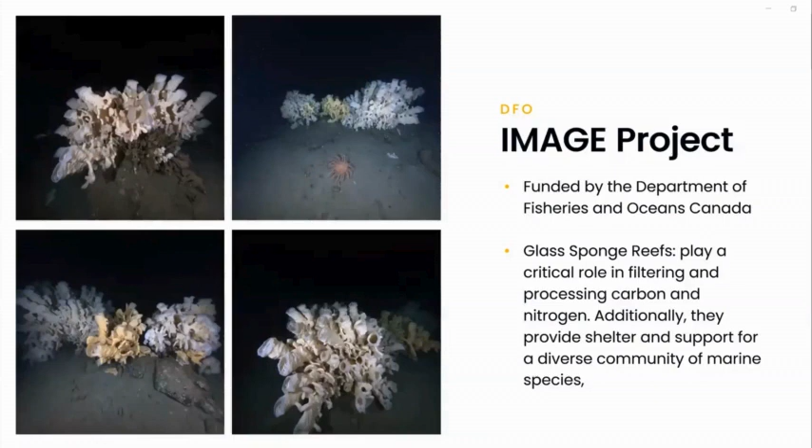The project has two main deliverables. Firstly, the 3D models, which will be used as a baseline to detect changes in the health of the reef for comparative analysis to data collected in future surveys. The second is to help with governance of the MPA, meaning identifying illegal fishing activity that could be taking place in the protected areas. We were able to achieve both of these goals, as can be seen in the models shown today, but also in some of the image and laser data, one of which clearly identified a net embedded in one of the reefs.

Next we'll go on to one of these really cool models that we collected. This is a forward-facing camera model of a reef on a cliff.

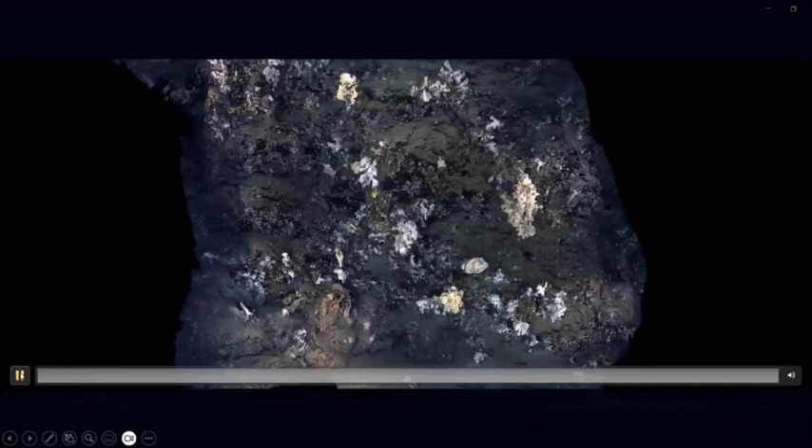Along with the deliverables, there were also four major goals we wanted to accomplish with the project. The first goal was to develop a viable monitoring system using our equipment, a solution that could be deployed from a dynamic platform like an AUV or an ROV to allow efficient and remote monitoring of these MPAs.

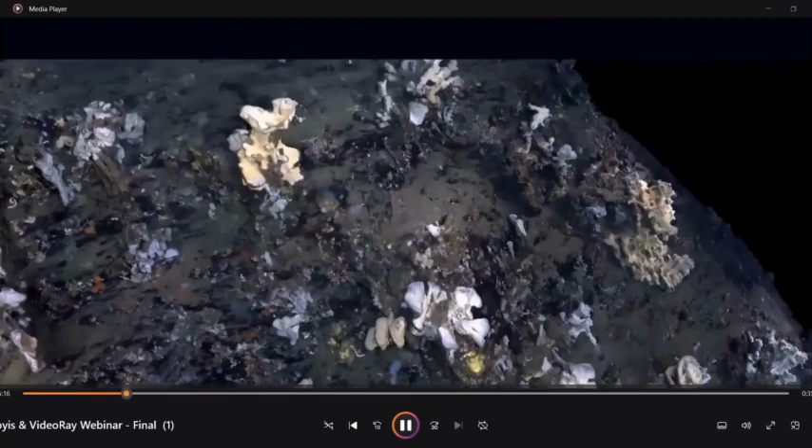The second goal of the project was to collaborate with the indigenous communities through training and mission planning. The traditional ecological and environmental knowledge provided by these communities is invaluable. The project looked to help empower indigenous communities with the technical capacity to actively participate in marine and environmental monitoring and ocean conservation planning.

Next was the physical survey of the habitat and the analysis of the data. It was important to work with different resources to effectively build out mission plans that would allow us to obtain the necessary data for analysis of the habitats of interest.

The final goal, once again, focused on governance and education. This included disseminating the data that was collected to help ensure further education and inform the development of novel methodologies, as well as site establishment.

Additionally, we looked to perform some assessment of an unsupervised training method, which automatically clusters the image data into a structured database. From there, representative images can be selected for each feature of interest, such as live reef versus dead reef, or any other feature of interest within these images, and then geospatially mapped to understand the distribution. With this new technology, researchers can enhance their conservation plan and decision-making.

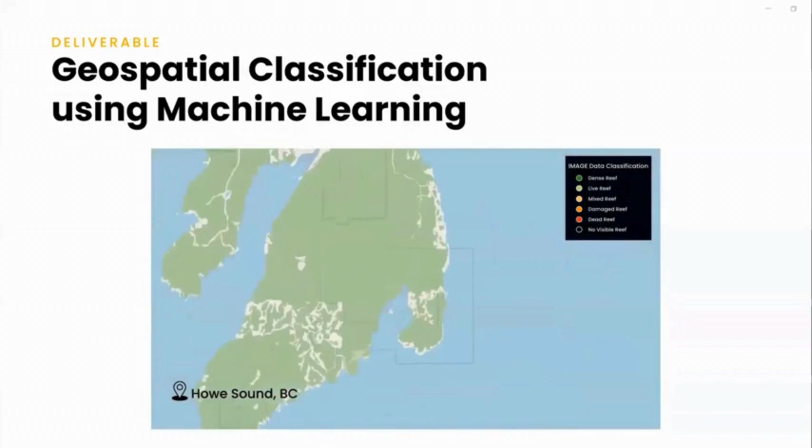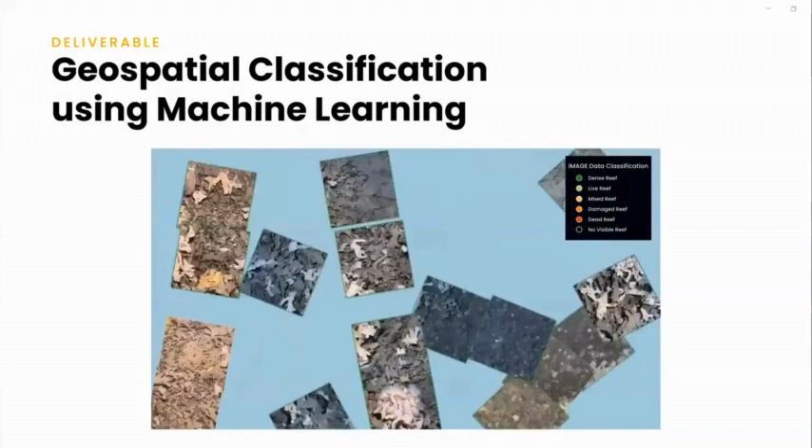The video currently being played is an example of stills image data tied to transects performed by the vehicle. The singular images represented show an average image found within that specific cluster at the provided location. All of our images have georeference on them, and that's partially the reason why we are able to do this.

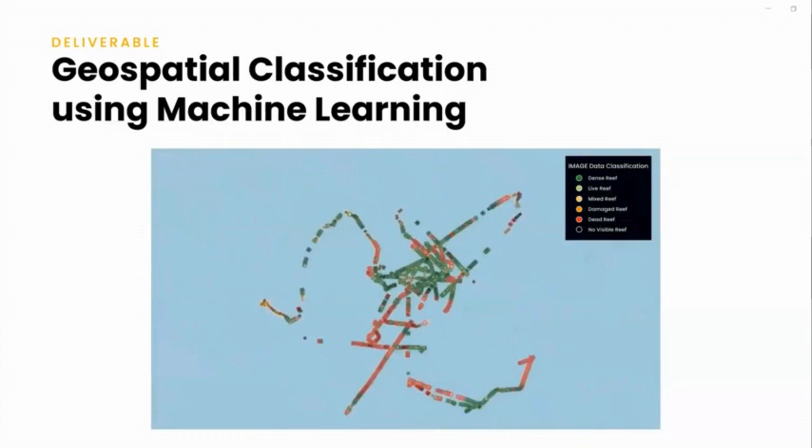So now let's talk about the project, and we'll focus a little bit more on the actual technology that was used to obtain the amazing results.

Here at Voyis, we've been working for some time in collaboration with VideoRay to enable the deployment of our sensors from their vehicle. For this project, we equipped the VideoRay Defender with the Voyis Discovery camera for enhanced piloting and forward-facing data collection, a perception skid for downward imaging and laser scanning, and finally a Sprint Nav Mini for improved navigation.

The Defender is an optimal vehicle for this application, as it's got maneuverability, which helps ensure that we are able to obtain the proper vantages of the target. This is important to collect data from all angles.

So now a little bit more about Voyis as a company. I want to provide you with a little bit more information and take a deep dive into the specific systems that were used on this project, their capabilities, and their functionality.

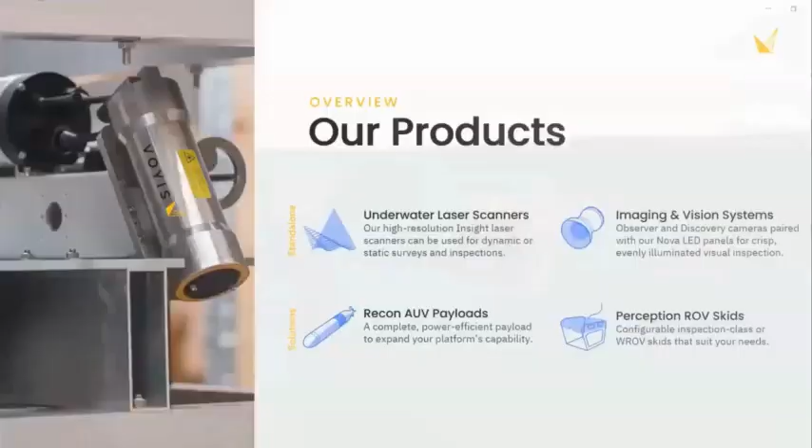At Voyis, we look to provide versatile optical solutions that expand your underwater capability and enhance the understanding of remote challenging environments. We accomplish this by using subsea laser scanners and digital stills cameras with data enhancements and corrections on board the sensors to enable real-time analysis of data on the fly. So as you can see, we provide standalone sensors, but also a few different offerings that are a combination of our core products, the laser scanning and stills imaging equipment.

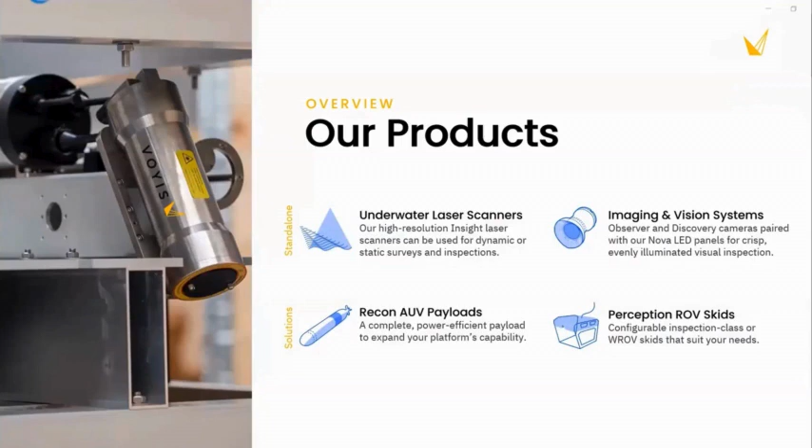Jumping into more details on the products, first up is our Insight underwater laser scanning systems. I'm not going to go into much detail about the different models. If anybody's interested, by all means ask afterwards, reach out. But I want to expand a little bit more on the Insight Micro, as this is the system built into the perception skid, and this was the equipment used for the downward collection portion of the survey.

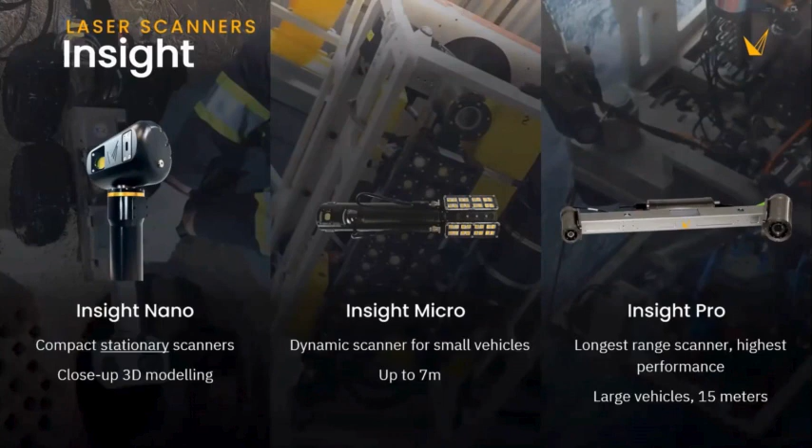So the Insight Micro is a dynamic laser scanner that enables small vehicle platforms to perform high accuracy inspections by combining both laser and stills imaging equipment into a singular package. As you can see there, we've got the built-in stills, laser emitter, and LEDs all in one single package.

Now a little bit about how the system actually works, its functionality. The system provides gapless laser data such that the two technologies cause no interference to one another and work harmoniously to collect dual data sets of the same target. This is achieved by capturing stills images in the short time in between laser pulses. This helps ensure that there'll be no visible laser lines in the stills data, and vice versa, that the flash from the LED will not wipe out the laser line.

The laser itself projects a 50-degree swath, which is swept across the target. This line is comprised of a series of individual points, which are triangulated based on a fixed distance between the laser emitter and the laser receiver. And then all of the data from the point clouds can be viewed in real time by the topside operator as the data is being collected. Now, obviously, the caveat to that is it has to be a tethered vehicle. Otherwise, all the data will be saved on board the sensor itself.

So next, we will jump into the discovery systems. The Discovery Vision systems were designed to avoid compromise between using a piloting camera, which prioritizes low latency over high quality data, and inspection cameras, which tend to prioritize high quality data over low latency.

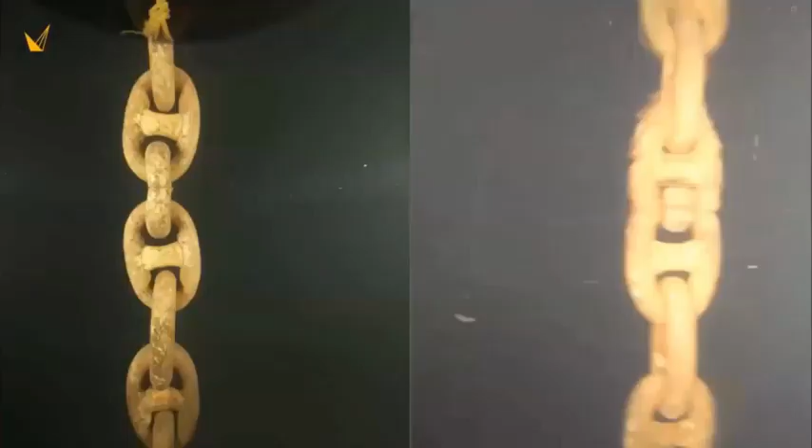This is an example of comparative images collected from a standard ROV camera versus our Discovery camera, in a low light situation. We can see the Discovery camera provides a clear representation of the target. This is largely because it leverages a high dynamic range with 12-bit depth, uses a global shutter rather than a rolling shutter, and captures images at extremely low exposure times. Coupling this with real-time enhancements of light leveling, color correction, and distortion correction shows the quality of the data, which will help improve efficiencies in ROV operations.

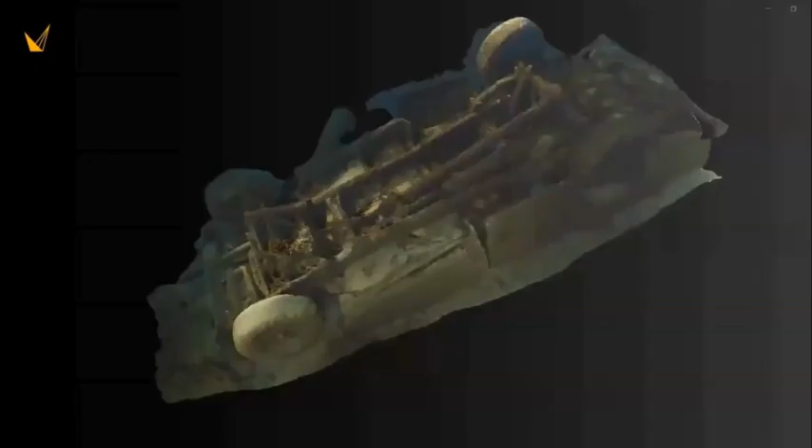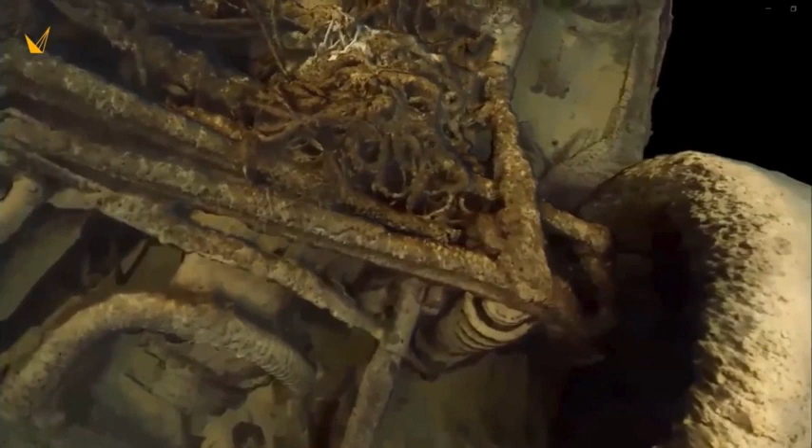Here is another example of a 3D model generated using images collected from the Discovery camera, deployed from a VideoRay Defender vehicle. This model was made using off-the-shelf photogrammetry software and images generated from the Discovery camera. I think this model perfectly exemplifies the ease with which the final product can be obtained when utilizing really high quality data for model generation. Now, it's important to take a closer look at the process which allows us to obtain these high quality images.

One of the key features of our imaging systems are the real-time correction algorithms applied to the data. All images collected from our imaging solutions are run through a series of algorithms to enhance image quality and correct for the underwater environment. First, the images are subjected to an undistortion and debayering process. From there, the data undergoes light leveling to establish even illumination across the entire image, so there are no dark edges or corners, which is very important when building out photomosaics or photogrammetry models. Finally, the images are color corrected.

However, the actual hardware used to collect the data plays just as much of a role in the quality of the data as the enhancement algorithms. One of the key features that makes these enhancements possible is leveraging dynamic range to its fullest extent.

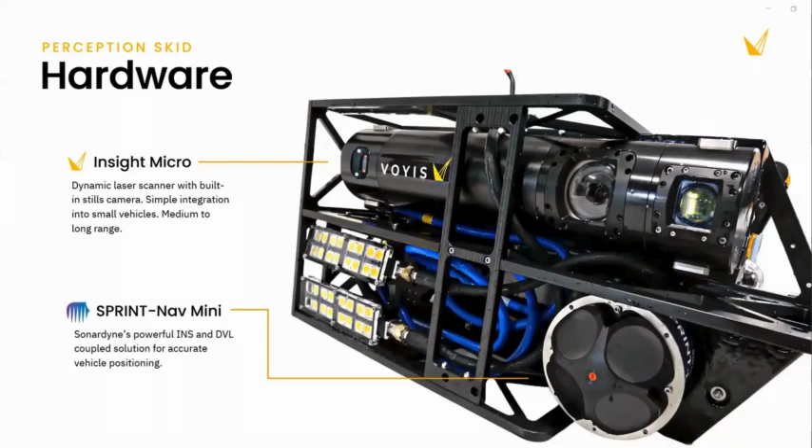Now, finally, I want to touch on a few of the various applications that ocean science focuses on and that the systems are commonly used for within that space. So the ocean science sector is actually quite interesting, as aspects of it actually span across all four major markets that we cover at Voyis. However, there are traditionally three applications that we focused on in the past.

So firstly, area mapping and marine archaeology, building up models and maps of wide areas or specific archaeological sites. And I'll show a couple examples of that later on. Next would be benthic habitat and coral monitoring. This application tends to be centered around the monitoring and analysis of MPAs, their health and changes over time. So very much in line with the image project that we just completed.

And finally, flume tank and lab-based inspections, where we have a non-intrusive laser that's fully submerged and capable of identifying sediment transport, scouring, and ice-based research. So very much flume and basin-focused research. So now just a couple more examples of projects that share similarities to the image project and highlight some of the capabilities of the system.

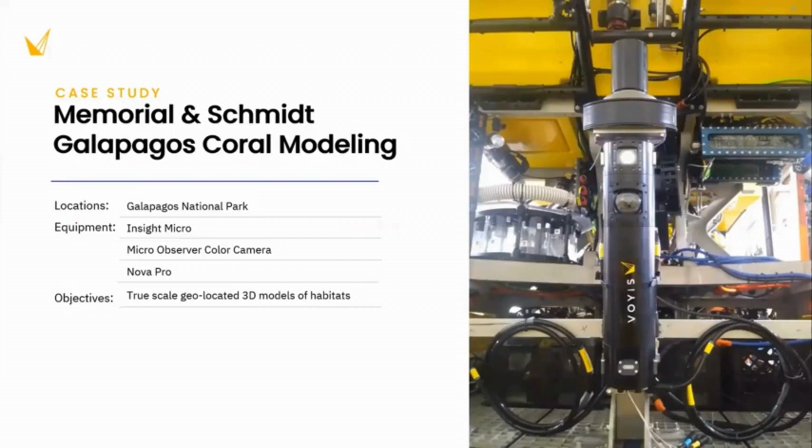So to wrap up the Voyis part of the presentation, and before I hand it off to VideoRay, I wanted to highlight another recent project that we completed. This was with Memorial University and Schmidt Ocean Institute. We were really lucky to be a part of this project, and we provided the Insight Micro to capture data in the Galapagos National Park. Once again, the focus was on the imaging and modeling of corals to help determine the health.

So we played a pretty small role in the project, as obviously there was a lot more to it than just the imaging and modeling of corals. But we were actually able to help identify two pristine reefs surrounding the Galapagos. Now, unfortunately, I can't share a lot of the data as of yet because it's still a fairly new project and a lot of it hasn't been released. But I can show a couple of the highlights, which really show the amazing ecosystem and how it's been preserved by conservation efforts.

Working with Schmidt was really amazing because we were able to devise a mechanism that would actually allow us to adjust the angle of the scanner on the ROV. So we could do downward-facing seabed scanning, as well as adjust the angle to forward 45 degrees, and a complete forward-facing system to scan and model faces and vertical faces of various cliffs and walls under the ocean.

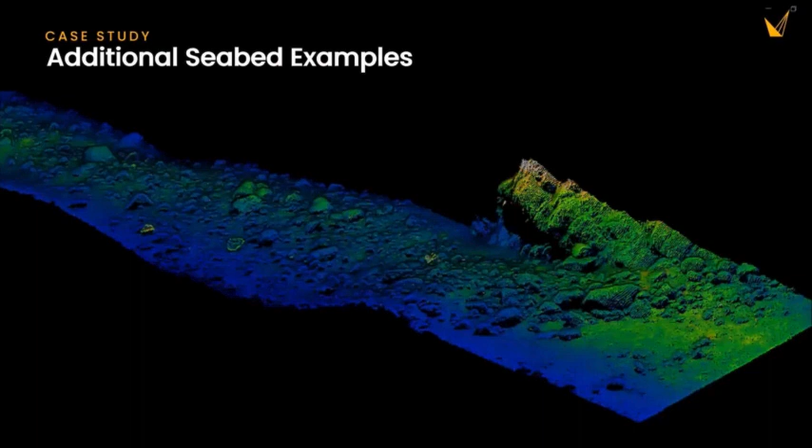And lastly, this is one of the many shipwrecks we've modeled. Once again, it's a great example of the level of detail that can be obtained using the laser system. We have a lot of subsequent imaging data that can be used to build up photogrammetric models of the same kind of targets. So thank you for listening to my portion of the project. I'll now pass it on to Brad so he can talk a little bit more about the ROV that was actually used for the project. So Brad?

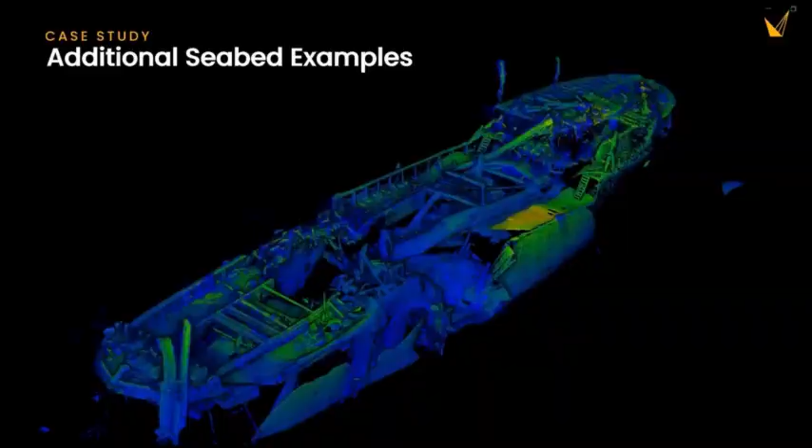Again, thanks for the introduction, Brendan. I'd like to introduce myself. My name is Brad Claus, Global Account Executive with VideoRay, with focus on markets of offshore wind, oil and gas, aquaculture, and science and research. It's something we're very excited about, partnering with Voyis. The capabilities of these camera systems are truly revolutionary, in particular for the inspection class vehicles. So that enhanced capability lets you offer customers a true end product that, in the past, we had to actually have world-class submersibles performing these tasks.

Okay, and here I'll talk about our mission specialist products. At the moment we offer two different submersible classes, one being our Pro 5 vehicle, and the second being our Defender vehicle. Mainly here we'll be talking about our Defender submersible, which is the same vehicle that was used for the scope performed by Voyis. Again, the vehicle is set up with a true flexible modular design.

The ability to integrate and accessorize different components on the vehicle is very seamless and easy. The vehicle is set up on an Ethernet-based backbone, where you truly just have to mount the hardware to the vehicle, set up an IP address, and then you're up and running.

For relentless reliability, I'd say it's best in class for this style of submersible. We're one of the only vehicles that actually offer a 2-year warranty for the product. In addition, I think to date, our longest dive time that we've performed on a site was right around 6 months. So again, another metric to attest to the reliability of the product.

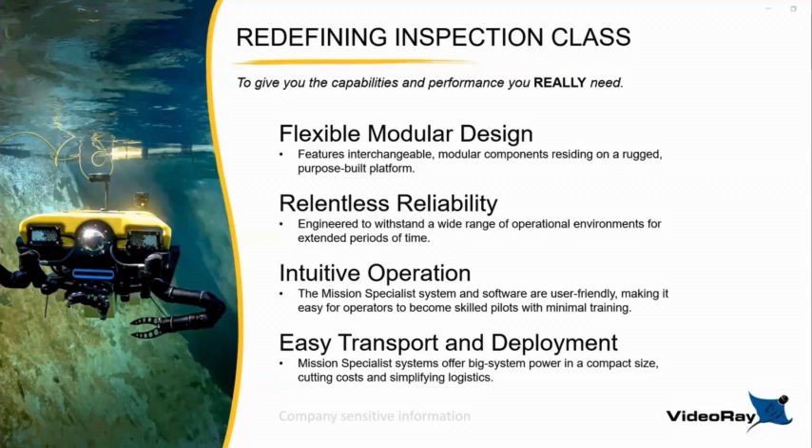So the standard configuration of our Defender vehicle is 300 meter rated. We can perform upgrades to the vehicle to make it capable of running at up to 1,000 meters. Now, in addition, we are currently working on options to actually take the submersible down to 3,000 meters. Again, max speed 4.1 knots. In addition, it has the ability to go lateral over 1 knot, and the ability to ascend or descend at over 1 meter per second.

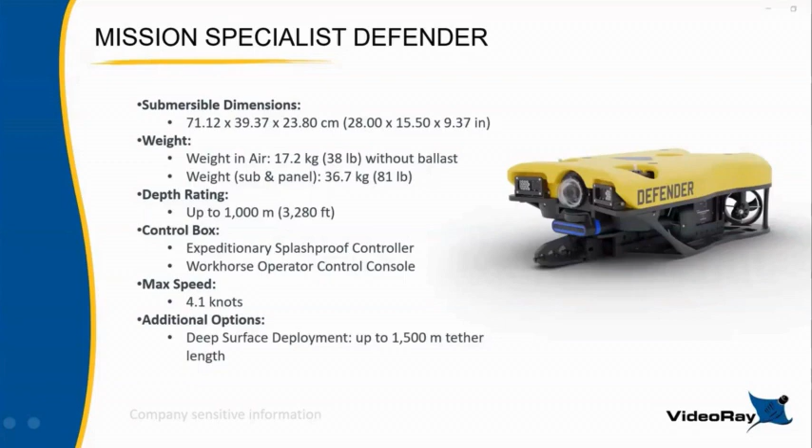A couple different control options we offer. One is our standard OCC, which is a full PC power supply, 19-inch monitor, but we do have some other options where you can go with a splash-proof controller. Again, IP65 rating, for if you're working in less than marginal conditions, or have any concerns with the elements, rain, snow, etc., you'd have that option where it could actually work in those types of environments.

Again, there's a ton of different payloads we could offer with the vehicle, some to include multi-beam sonars, scanning sonars, rotating manipulators. The one shown here that's actually on the vehicle is one of our simpler manipulator designs. It does offer a parallel V-jaw, sampler jaw, trident jaw, and cutter, but we can offer, again, task dependent on the customer's requirements.

We could run with single or dual, 3-function, up to 7-function, rate controlled or spatially correspondent manipulators. So it depends on what the tasks are, and that's what our SMEs are set up for, to understand the client's exact needs and create a build that'll meet their expectations.

In addition, navigation package, so full semi-autonomous control, the ability to complete complex missions. I always use the analogy: the way our navigation package is set up, if you want to inspect an area the size of a football field, you could simply plot out whatever predetermined region you want to inspect within the software, hit go, and the vehicle will do the entire inspection on its own. Again, multi USBL systems, we offer a ton of different options on that as well.

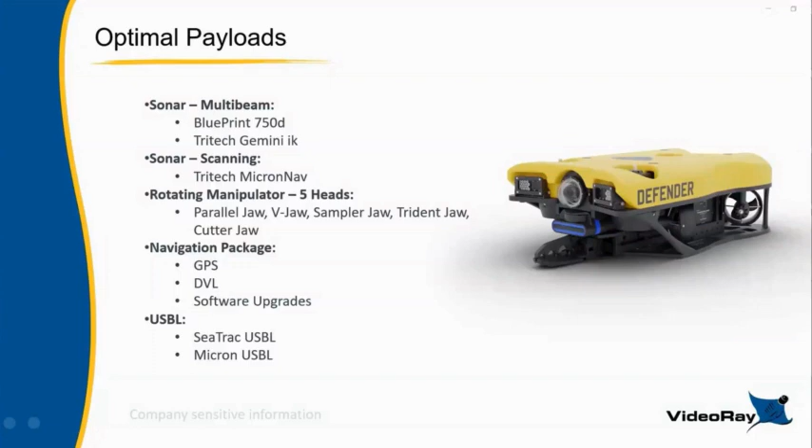This is truly the key to the vehicle: the modularity. The way the vehicle is set up, there's no 1 atmosphere housings. Everything on the vehicle itself can be swapped out pretty seamlessly due to the modularity of it. So flotation, the AHRS, power modules, batteries, DVLs, the software could actually troubleshoot it down to the component, and then if you have a failure, it's simply swapping out that component. We're geared up to where any component on the vehicle can be swapped out with a replacement in, I'd say, under 20 minutes or so.

So again, the modularity of it is a big advancement, in particular if you're working the vehicle in critical path operations where time is of the essence. If you have a failure, at least you're back up and running very quickly.